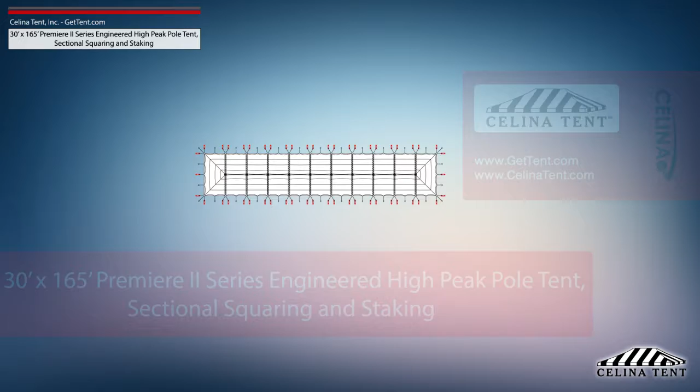gettent.com. This video covers squaring and 5-foot staking applicable to a sectional 30-foot by 165-foot Premiere II Series high-peak pole tent from Celina Tent. 5-foot staking is standard for tents with an eave height of 7 or 8 feet and would need to be adjusted for eave heights other than this standard.

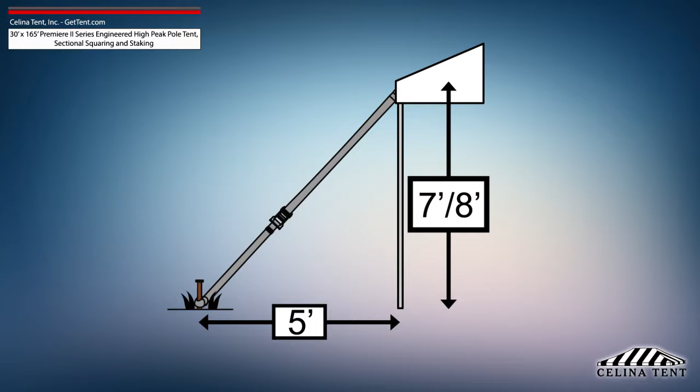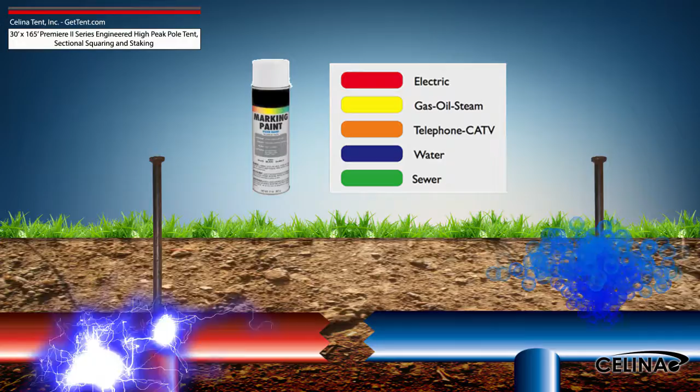Tent squaring allows the installer to accurately place all tent hardware and install tent stakes prior to beginning setup, and helps let them avoid any marked underground utilities. Utilities must be marked by your state's local utility services prior to any tent installation.

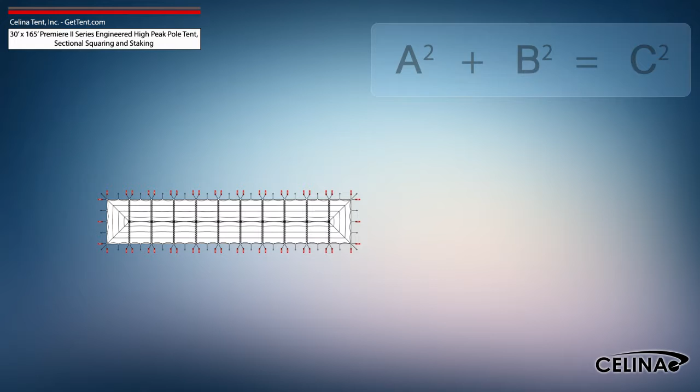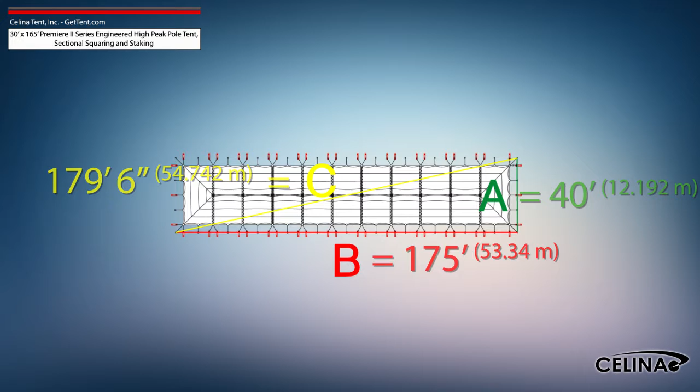Using the Pythagorean theorem and adjusting out for 5-foot staking, the entire tent footprint will be 40 foot by 175 foot, with a 179-foot 6-inch diagonal length. Celina recommends that a 30-foot by 165-foot Premiere II Series high-peak pole tent receives a minimum of 140 stakes.

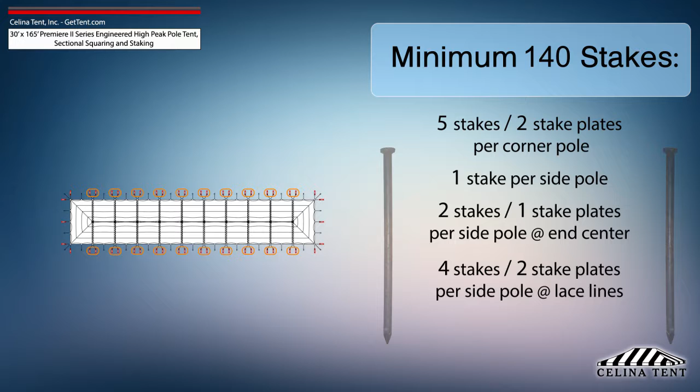5 stakes and 2 stake plates for each corner pole, 1 stake for each side pole, 2 stakes and 1 stake plate for the side pole at the center of each end, 4 stakes and 2 stake plates for each side pole at lace line locations, and 1 stake for each center pole. This amount of stakes provides the minimum amount of security for a pole tent of this size. Additional staking is required for any site that doesn't meet optimal soil conditions.

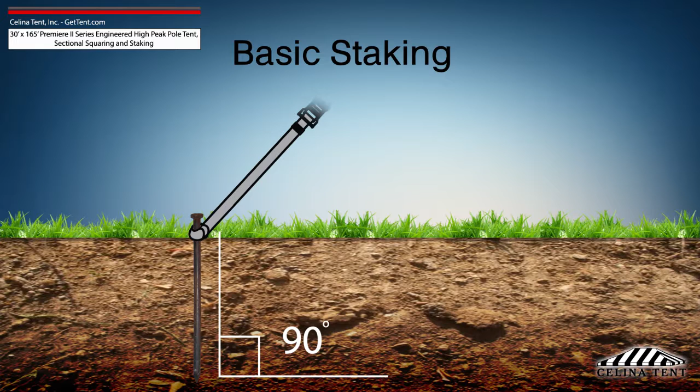Tent staking is the most important safety procedure during tent installation. Tent stakes should be driven vertically so that the stake is as close to the ground as possible with space to tie on a strap. Any length of stake protruding from the ground that is more than 6 inches will have detrimental effects on the holding power of the stake. Attach the ratchet strap or rope as close to the ground as possible to reduce strain on the stake.

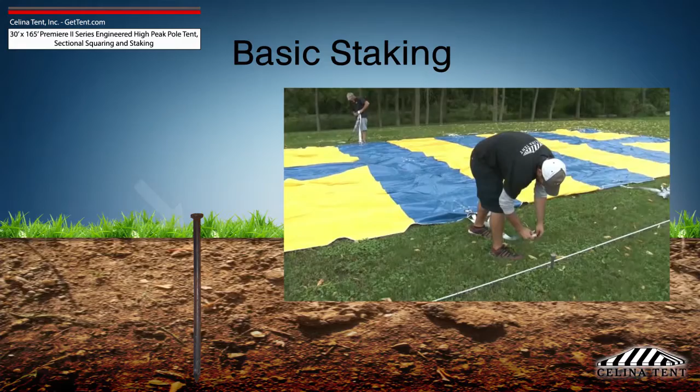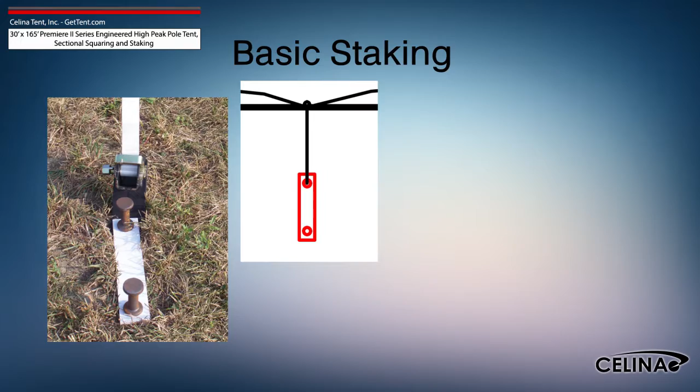It is the installer's duty to inspect the soil conditions and possible weather effects for the duration of the tent installation. For water-saturated or loose soil, more tent stakes are required to achieve adequate anchoring. Staking may be increased using dual stakes and a staking plate, or gang staking utilizing 2 staking plates and 3 stakes.